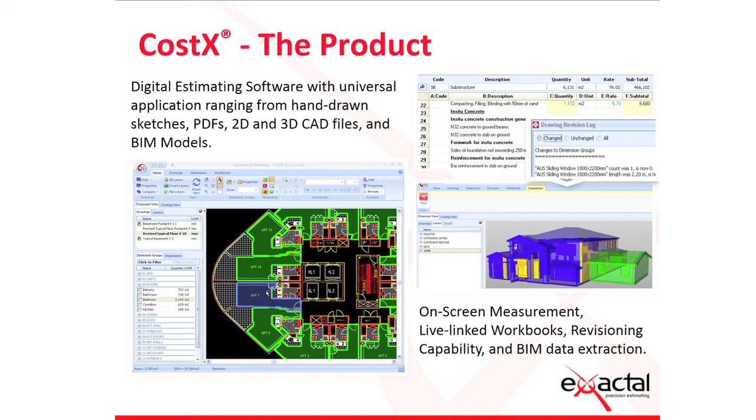The fact that it live links the quantities into the workbook, so the quantities that we take here are actually live linked into our workbooks, which means that if you update the quantities, the workbook updates too, and that live linking sort of helps to avoid scope creep, those sorts of things. Particularly the revisioning capability, the fact that when the drawings change, because we've linked into the CAD data or the BIM data, we can actually show you where the changes occurred and update the quantities. So again, that sort of elimination of scope creep is a very important aspect.

So essentially that's what the product is, and the reason people are buying it is for those sorts of key reasons. Now, because tonight we're going to be talking about BIM, and it's always important to make sure that everyone's on the same page as to what exactly BIM is.

So any kind of drafting, whether it's 2D or 3D, is simply lines on paper or on a computer screen. To denote a door, we simply draw a straight line for the door leaf, curved line for the swing arc. We all know it's a door, but it's just lines.

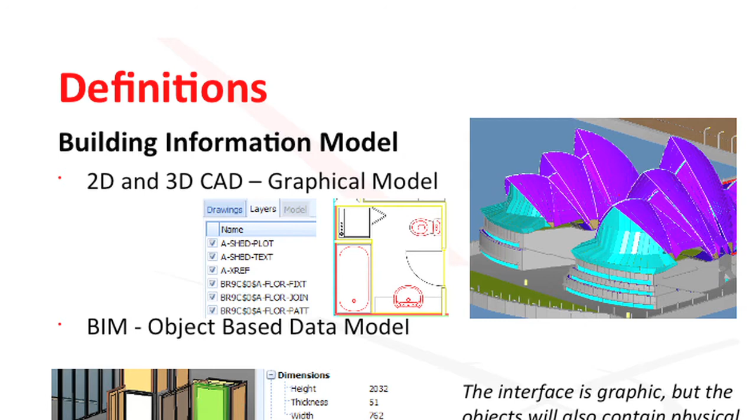BIM is object-based data modelling. The designer literally builds a model out of a kit of parts. They have a library in their computer. That library is database driven. It consists of objects. If they want to put a door in a building, they go to their library, select a door object, place it in the building. The door knows that it's a door.

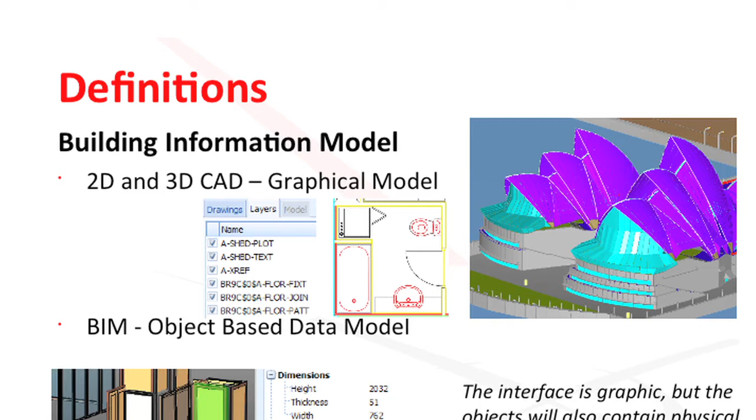It carries properties relating to the door. And importantly, it also carries properties about its interrelationship with other objects. So when it's placed into a wall, the wall knows that there's a door, an opening gets formed. And it's that interrelationship of the objects that provides a lot of the power of BIM modelling. And it's also the fact that you have that data that you're then able to share amongst the team and to carry out various analyses of the model.

So the differentiator is BIM is object-based data modelling. It's not 3D drawing.

Building information modelling, I mean, BIM is an acronym. A BIM model is not really, it's a building information model. Building information modelling, it's like the distinction between a cost plan and cost planning. Cost planning is the process that you go through, as opposed to a cost plan that's a snapshot at a particular point in time. Because of that data model, you have the ability to analyse the model, run what-if scenarios.

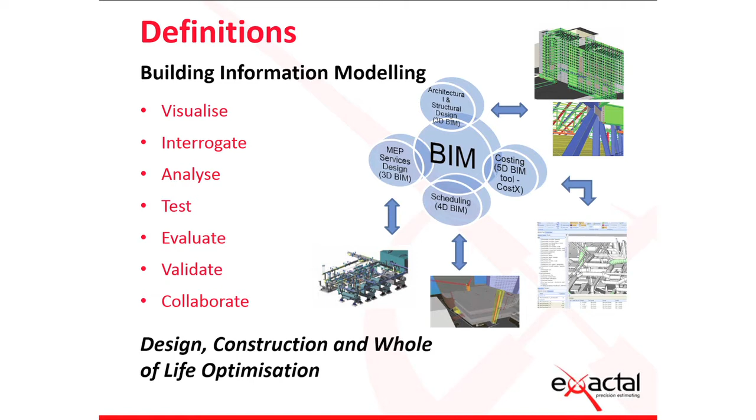Test the design, test various options, and it can all be done very quickly and readily. The information that populates the model obviously informs the analyses that you do, so the better the information in the model, the more reliable the outcomes are that you're going to achieve. But simply, it's the fact that you can optimise the design by simply running any number of analyses to test the design and basically validate it virtually before you actually press the go button.

So that's what building information modelling is. So why is it of interest to quantity surveyors and estimators? Well, because improving cost outcomes is obviously a major performance metric for any project. That speedy data extraction enables you to basically process more data more quickly, so you can provide better advice. So you can feed back to the design team.

You can do it much more quickly, so that traditional lag where you used to wait to receive drawings, you'd measure them up, do your analysis. By the time you get back to them, they've already moved on, they're on a different page. You can virtually talk to them in real time.

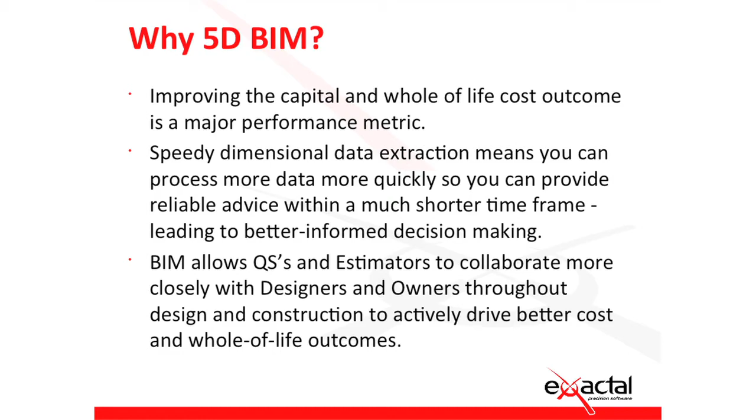It's not always important to have absolute figures. Often you're just running comparisons, and the fact that you can run comparative options almost straight away and feedback means that you can really actively collaborate and contribute to the development of the design in a way that you just haven't been able to do before. So that's why it's important to get on board with 5D BIM.

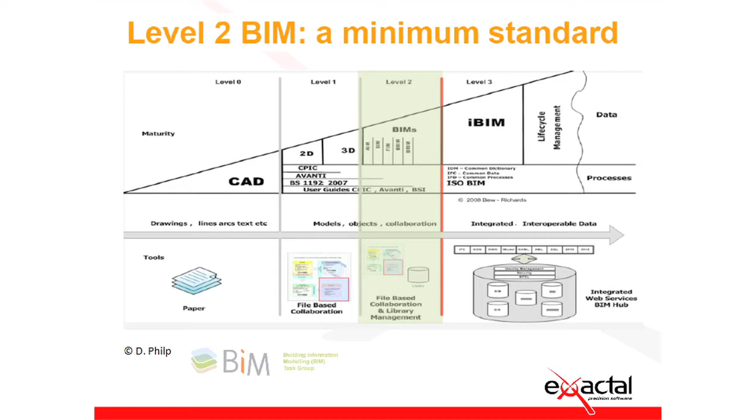Now, we were all aware of the Cabinet Office mandate for BIM adoption by 2016. There's been a lot of talk about it, and I guess the question is, what does it actually mean? So this chart, the Bew-Richards chart, talks about level 2. It's probably hard to see the colour, but they've sort of mandated to try and achieve level 2 maturity. The chart here simply you can see developing from CAD, 2D, 3D, drafting through BIM, ultimately to iBIM. They're looking for level 2.

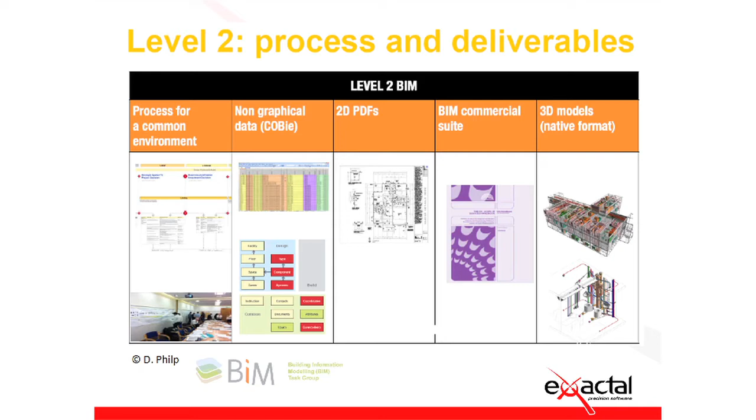Interesting though, the process and deliverables that are also defined as part of that level 2 has 2D with a very important function right there in the middle. So you're talking about a suite of documents, if you like. It's not just that there'll be a model and you'll have to work off that model. There'll be a set of information, and the information will contain a variety of different data types and sources. And importantly, it'll include a 3D model and it'll include 2D PDFs as well. And not necessarily PDFs, they can be in CAD format.

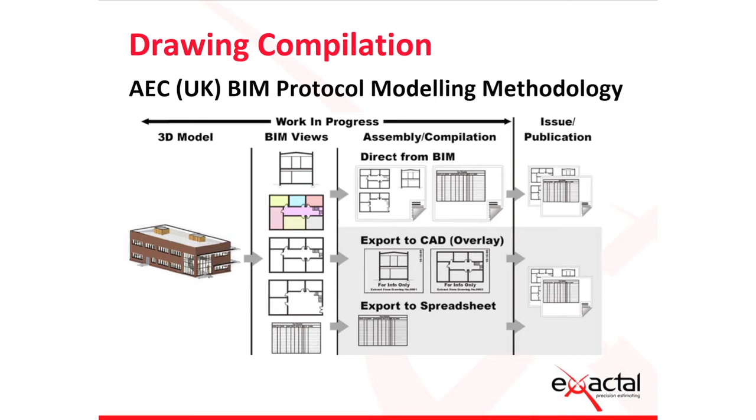If you break that linkage by putting output into CAD and then adding information in CAD separately, then of course you've broken the linkage, so you're not getting the benefit of the single source of information being the BIM model. So really this is more like the level 1 that we were talking about. This is level 2 up here.

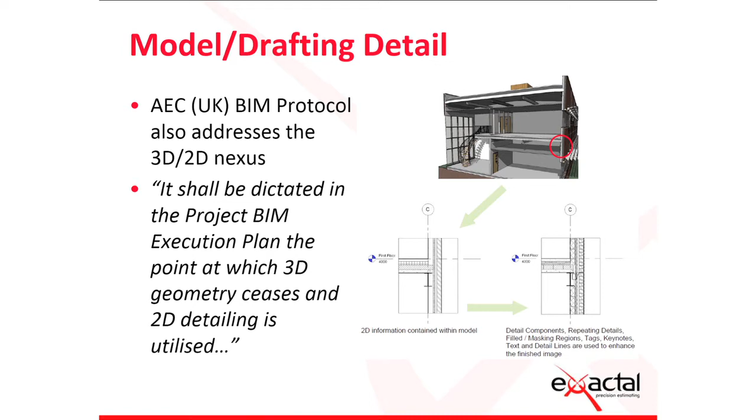So the AEC protocol also addresses this 3D, 2D nexus. So it actually says it'll be dictated at which point 3D geometry ceases and 2D detailing is utilised. So this is important because you can't model everything in 3D. And certainly for communication purposes, it's sometimes better to put things in 2D. If you're trying to do a furniture arrangement, it's a lot easier to work on a plan than it is to try and model it in 3D. So working from there, there will be a point where it's simply better and easier to put 2D detailing in.

The other important aspect of this is that it reduces the model size, because too much information in the model just makes the model unwieldy. It's cluttered and the file size is too big and people downstream can't handle it.

So that introduces an important concept known as level of development, which is defined by the American Institute of Architects, but actually has pretty much been adopted now. It's not the level of detail, it's not drawing detail, it's the reliability of the data. In other words, it's how far the design has actually been resolved, what decisions have actually been made that you can rely on. So simply LOD 100, you know that you're going to put a chair, you don't know what sort of chair, you don't know what it's going to be like, that decision won't be made for another 18 months.

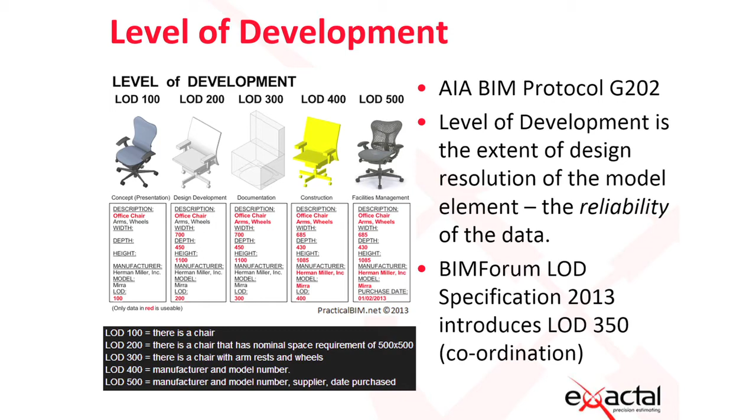So make sure you allow for a chair, but at this stage we don't know what it's going to be. As you go through 200, 300, 400, you can see it's the data being added that relates to the resolution of the design. It's not the detailing. Because what will happen is that at the very earliest stage of a model, there will be a lot of detailed rendering of things like chairs and furniture and all sorts of things. They will look very detailed, but the decisions have not been made yet, so you can't necessarily rely on them.

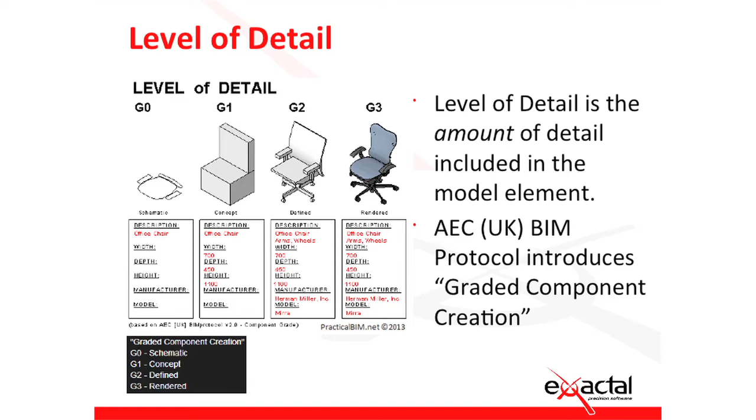This is as opposed to the level of detail, which talks about the resolution. And the BIM protocol has actually used a different name. They've called it graded component creation because LOD becomes too confusing. Do you mean level of development, level of detail? And so, as you can see, G3 is fully rendered. What you could well end up with is that you get a G3 rendering back at LOD 100. So as I say, it's the very earliest concept stage, but you've got a fully detailed chair.

And the issue with that, as I say, it'll make the model too big, it'll clutter the model, but also it's deceptive because you'll assume that decision's been made and actually it hasn't. So a BIM execution plan can include a table that lists out levels of development for the various elements in the model. So the way that this might look is, you can see here where we've got the level of development from 100 through to 500, similarly level of detail.

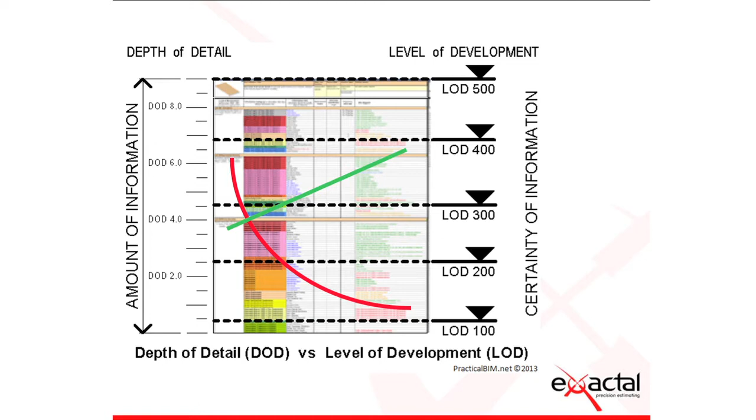What will happen with your earlier models is that you'll probably have a lot more detail than you do level of development. So BIM models look really impressive because they look so resolved, but they're not. They're very early in the stage. What you're actually looking for is something along those sorts of lines, where you've got a high level of reliability, the design decisions have been made, there's enough detail for you to see what's going on, but not so much detail that it makes the model unusable.

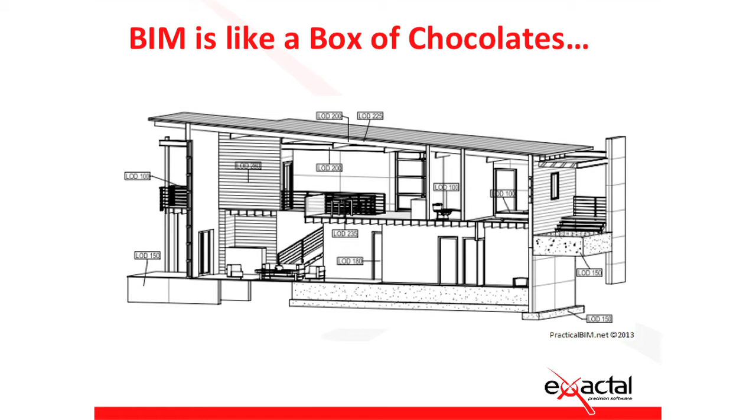What this means is that when you receive BIM models, the various elements within the model are going to be at different stages of development and different stages of detail. And part of what you have to do is sort out the wheat from the chaff. It's all usable, it's great, but it's the judgment you'll need to apply in pricing these things or rating them up as to whether they're a concept style decision, even though it's drawn in a high level of detail, or whether the specification is actually finalised and you can rely on it.

Just quickly, there's often a concern with BIM that it means the designers have to do a lot of extra work, they have to put a lot of information in, or they have to code it for you. That's not the case. You don't actually have to ask them to do a lot. A default model still has a lot of usable information for you. There's probably only 3 things, and in fact there's 1 thing per file format.

If they're using Revit and they're going to send you a DWFX, they need to set their project units to 3 decimal places. Otherwise, the dimensional data generated in the model is rounded up or down. If you've got a commercial building with thousands of curtain panels, if every curtain panel is rounded up or down, it can make that sort of a difference to the quantity. So you definitely need the project units set to three decimal places.

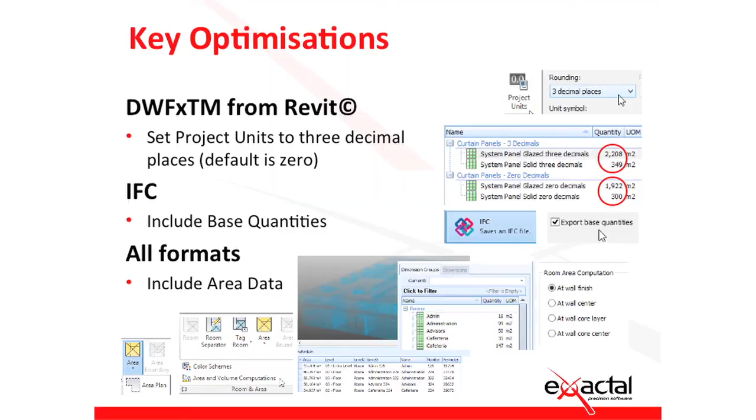If they're going to send you an IFC, that's fine, but IFCs by default in their current implementation don't include quantities. So you might receive an IFC and there's no quantities in it. They need to just tick a box: export base quantities. If they tick that box, then you get the quantities.

For all formats, just ask them to use the area tool to define areas. It's very simple and quick to do, and certainly for early stage cost planning, receiving room areas and floor areas is really useful. Otherwise you've got to measure it yourself, which is fine, but if it's coming from the model, it's really helpful. So if they just do those things, that'll really get you off to a good start.

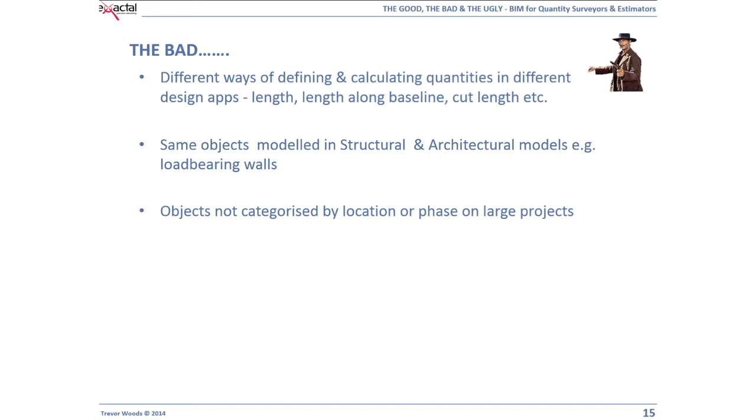Objects not categorised by location or phase on large projects, so where models have taken shortcuts. Uncategorised MEP systems, where everything is lumped in under the same system. Stairs, I thought, super, push a button, it'll give me the volume of concrete.

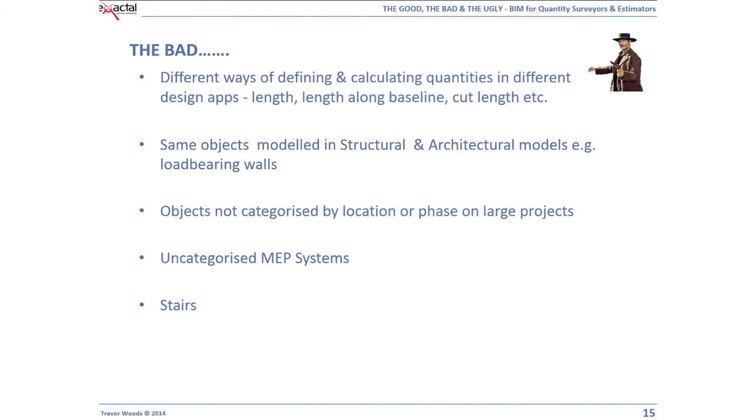No. T-shaped windows. Now, some of these issues have been fixed in later versions of the software. A project where there were T-shaped windows, it didn't deduct the correct volume or area from the wall that the window was hosted in. Another slide of bad. Wall areas, depending on how the wall joins or how they've modelled it. Wall gables can be an issue. Irregular shaped floor slabs can be an issue, but I'll explain these in a little

bit more detail. Rebar, haven't seen it in too many models. When it's in models, it's super. You can get the tonnage off the bat, you can get the sizes, you can get the lengths, no problem, but I haven't seen it modelled in too many models, especially not designers' models. Slabs, pads, beams and columns overlapping, where the volumes are a bit askew. Column lengths not transferring, they're in the Revit model, but they don't transfer out into the QS software.

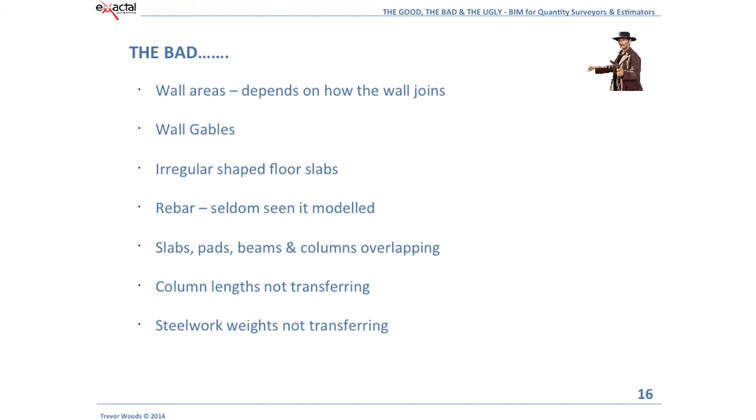Steelwork weights not transferring. So just to explain some of the bad, the perception is that the I in BIM is huge. When I started using BIM first, I thought, great, I've got a database with all of the specification information and all of the material information and all of the quantities in it. But in reality, the information component is quite small. So you're getting the information in there, but often it's cryptic, or there's information in databases that lie outside the BIM that you've got to try and refer to.

This is a sample of a schedule taken from Revit, one of the BIM modelling tools. And casework is built-in furnitures and fittings. Anyone guess what that is? It says countertop corner 600 depth, 625 wide, 900 high, and there's a keynote. And the next one is 6 of these FURN classroom wet area classroom, 2,800 wide by 900 high. Anyone guess what it is? Any sort of a wild guess at all? Yeah.

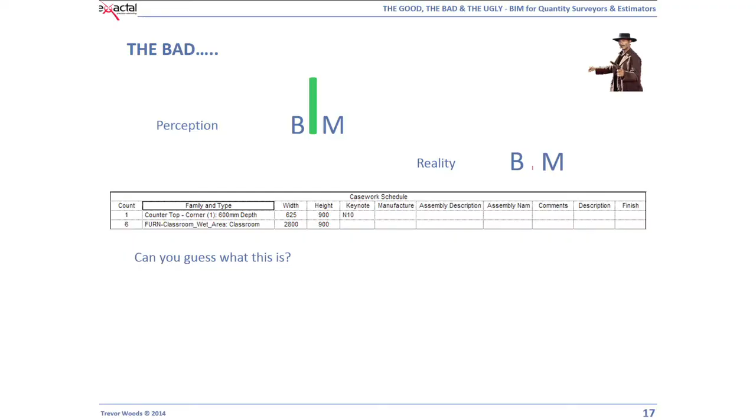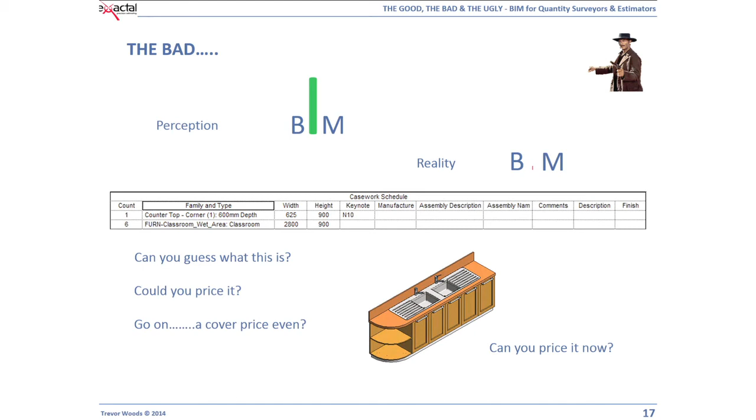That if an architect says, but I can give you the schedule, I can give you the quantities, don't use them and take them as gospel. You have to see the stuff in context. You have to be able to look at the item and see what does that relate back to. So yes, you can take the schedules, but I would take schedules from designers and use them to check my measure, whether it's a 2D measure or whether it's checking your 3D measure. But certainly don't just take it as gospel from the model itself.

Cryptic descriptions. This was a pilot project I worked on last year. This item was called, or was tagged as a roofing accessory. It's a bloody sculpture of a horse. Architect, super architect, but a sculpture of a horse was modelled. And it came in through the software as a roofing accessory. Now, you're pressed for time, you don't go and look. Fucking sculpture of a horse.

So, is it inflatable? Is it concrete? Is it bronze? Is it papier mache? Suffice to say, he was value engineered out. All right, didn't last too long. So a roofing accessory. So it's a cryptic description. It's not tagged. It's not labelled. If architects are going to do stuff like that, get them to put something in that you can say, well, it's a red flag, flag it, so that you know to look at it in some bit of detail.

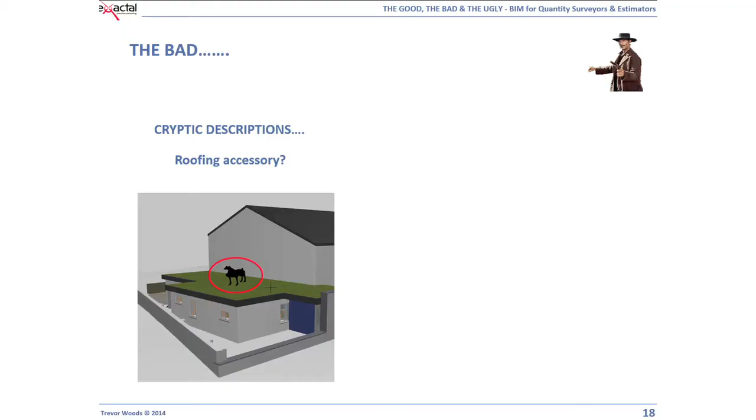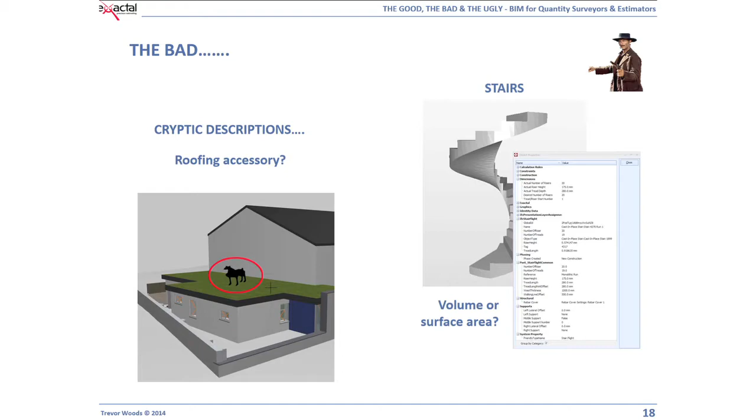This was an example, stairs, spiral stairs, you bring it in, you think, great, I'm going to be able to get the volume of concrete. Look at the properties, there's no volume or surface area. Okay, so you're still trying to figure out the volume of concrete in your spiral stairs. It gives you the number of risers and the width and the waist and various other bits and pieces like that, but in some instances it doesn't give you what you think you will get from it.

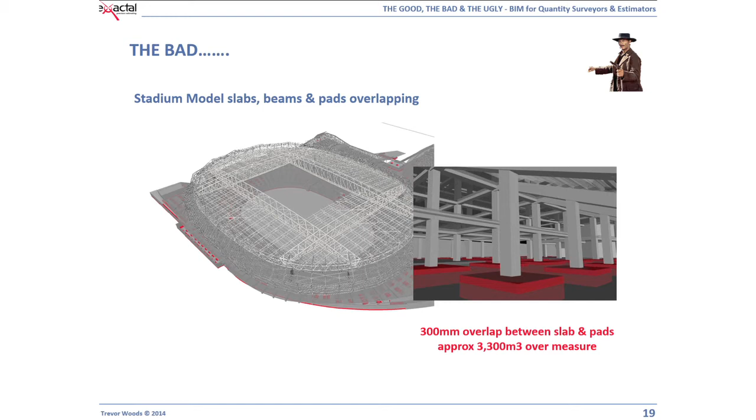The slab ran up to the top of the pads, and the pads, this red area here should have been deducted out of the slab. But what we got was a 300 mil overlap between the slab and pads. It was about 3,300 cubic metres of over measure.

The only reason we caught that was that we'd previously done an exercise on this in 2D, and we had the quantities, and we could say, yeah, there's an issue with the quantities. It's gone up by 3,300 cubic metres.

We were way down the food chain. We were sub consultants. We had the model sort of unofficially, so we couldn't go back and query it from the contractor or from the designers. We couldn't ask to see the model in its native format. We had it in a format called DWFX. But we picked it up, we used our judgment, we figured out there was an issue with it. It didn't tally. Visually, we saw it.

Uncategorized MEP systems. This is the same stadium project. There was 36 kilometres of pipework. 16 kilometres was classed as hydronic supply or return. That's all it said. It told us the material, told us the size, but they were all classed as hydronic supply or return. We were producing a cost plan.

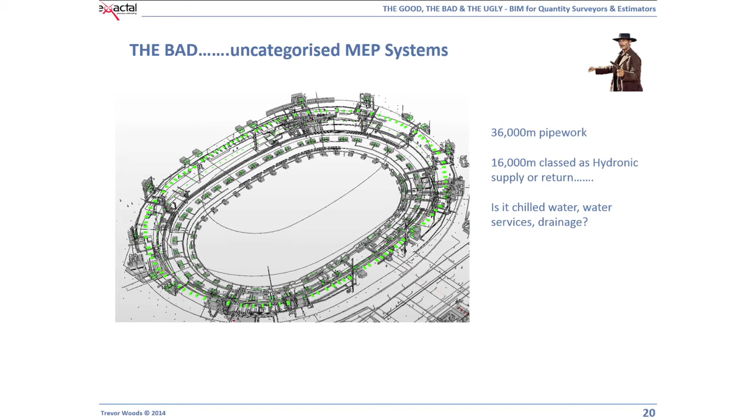So we needed to know, is it chilled water? Is it hot and cold water services? Is it drainage?

It was a simple matter for the engineers to go and tag stuff as they actually model it. For us, we had to go and switch stuff on and off and try and isolate items and try and see, well, what's it connected to? Is it connected to an air handling unit or a fan coil unit, or is it connected to a toilet?

So small things. I mean, it was super with the ductwork. To be able to go and measure the ductwork on that stadium in half a day was phenomenal. But we had some small issues with it we had to go and try and figure out, and the amount of ductwork in it was just ridiculous.

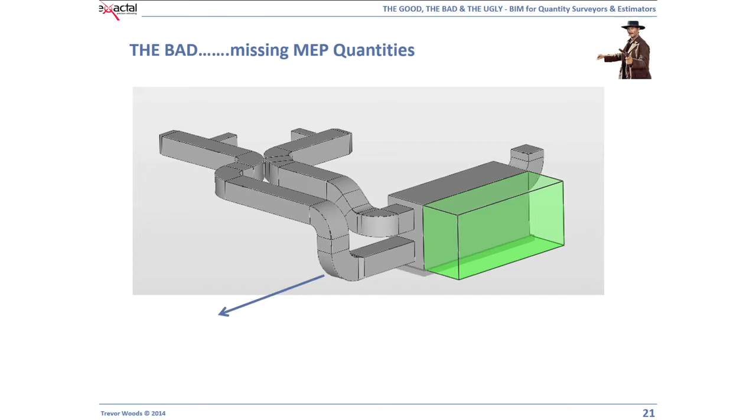Missing MEP quantities. This was a piece of ductwork from the model itself. It told us the number of bends, and we were doing the ductwork by square metre. It didn't actually give us the area of ductwork in the bend itself, so you were going back to try and come up with an approximate measure of ductwork for the bend.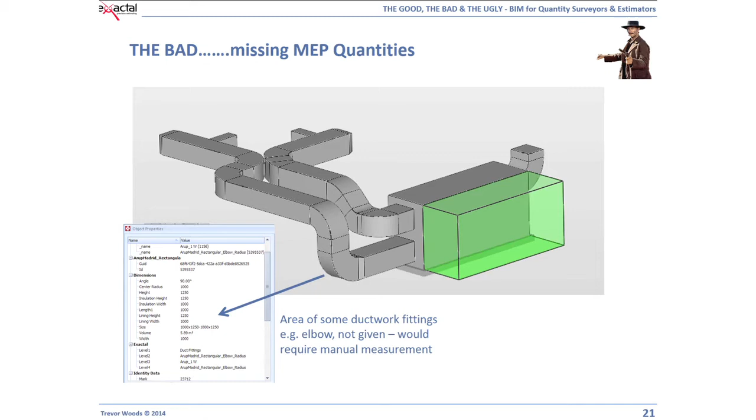So small things that can cause some annoyances, but the engineer, if he pushed his button, he still wasn't going to get the proper quantities out of the model itself. So if architects and engineers say, we'll push the button, tell them to go ahead and see what sort of quantities they want to get out of the model itself.

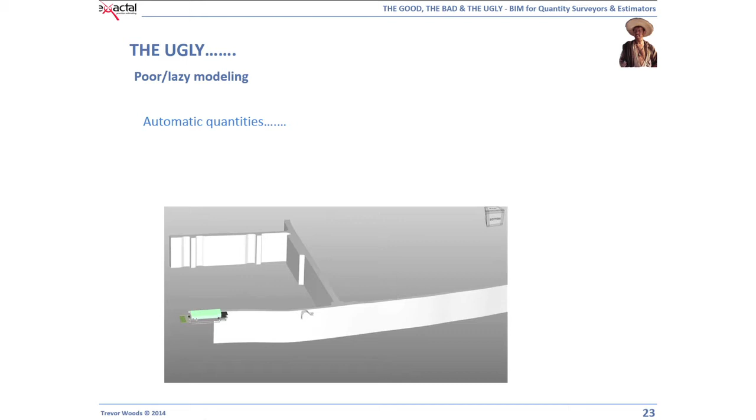The ugly, the poor and lazy modelling. This was a pilot project I worked on last year - a small community centre being refurbished. The architect, when he modelled a lot of the roads around the building, didn't set the bottom plane correctly. He should have probably set it at 400 or 500 mil, but it went to whatever number of metres.

This was all hidden, so you'd have a layer there which is your topography, and unless you get in and switch stuff on and off, you won't see it. So if the architect had gone and pushed his button, he would have gotten...

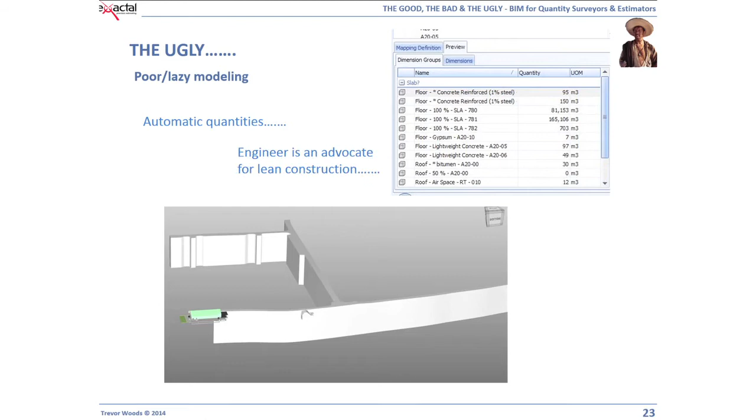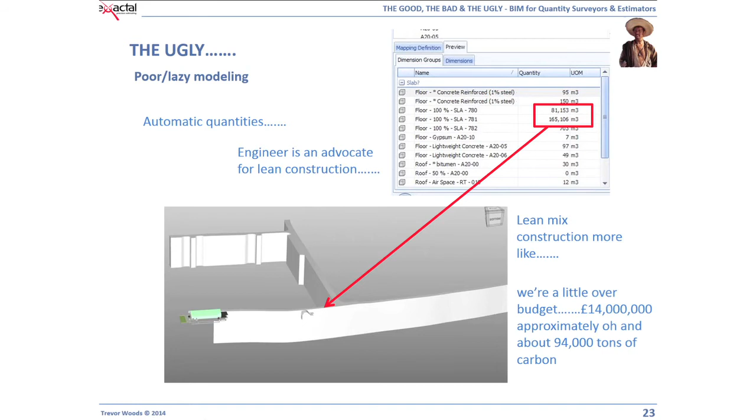On this project the engineer was a big advocate for lean construction - more lean mix construction. There was something like 81,000 cubes of concrete and 165,000 cubes of concrete in these structures here, about 14 million and about 94,000 tonnes of carbon. It was just an illustration to show the architect, well look, if you push the button and got your schedules, this is what you would have gotten. So QSs are needed to validate.

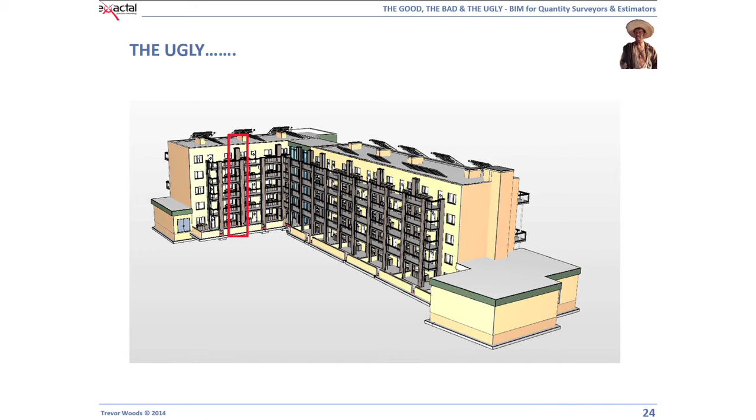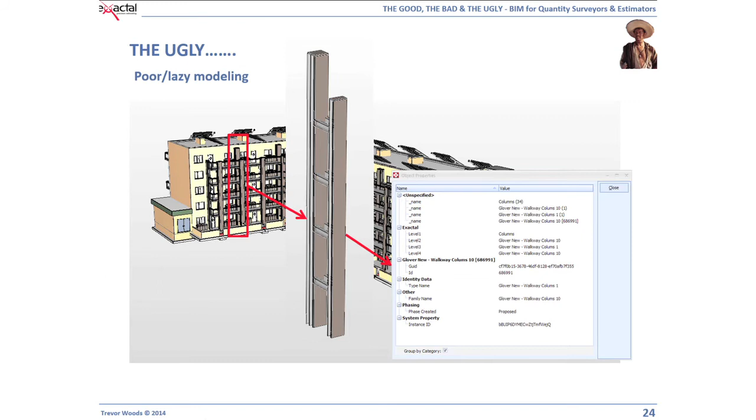Poor lazy modelling - this is a refurbishment project. The architect had decided to put on these external balconies but didn't have balconies or these objects in his library. He modelled them as a mass, so we got no information from that. It told me it was a walkway, columns one, family name was walkway, columns ten, and that was it. It gave me a count, so I knew there was twenty-four of those, and I would still have to go back in and do a manual measure on that.

If the guy had modelled it in a fashion that, well, we could have gotten the tonnage of steel from it. So really, that was worthless to a QS or to an estimator. It wasn't going to improve my process or make it any quicker.

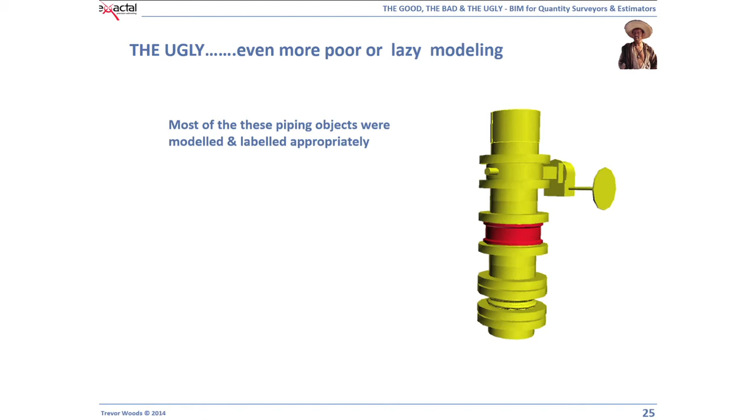This was another example of a project I'm currently working on - I think it's 500 mil diameter chilled water pipework. This object here, when we imported it through CostX, it was modelled as a 3D solid with no other information, no data about the object itself. We have a QS I work with who's phenomenal - MEP QS, mechanical QS, process QS - he reviewed it and reckoned something was wrong.

We thought maybe it's a gasket or a flange or something, not expensive. He said, no, that's a valve. He checked the P&ID and it showed us a check valve, worth about £4,000, and there were 15 or 16 of these on the particular system. So it was a big miss - either the P&ID hadn't been updated, the model hadn't been updated, or someone took a shortcut and it went in as a 3D solid because the valve didn't exist in their library.

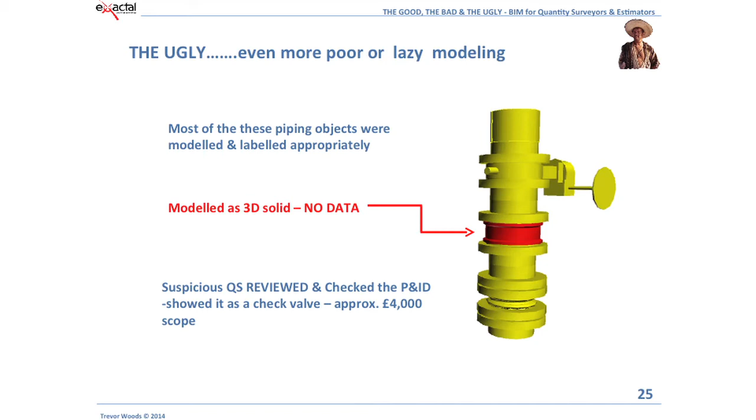The same engineer - I gave him a 12,000 line extract from CostX of MEP stuff, and within 5 minutes he could come back to me and say, the model is wrong.

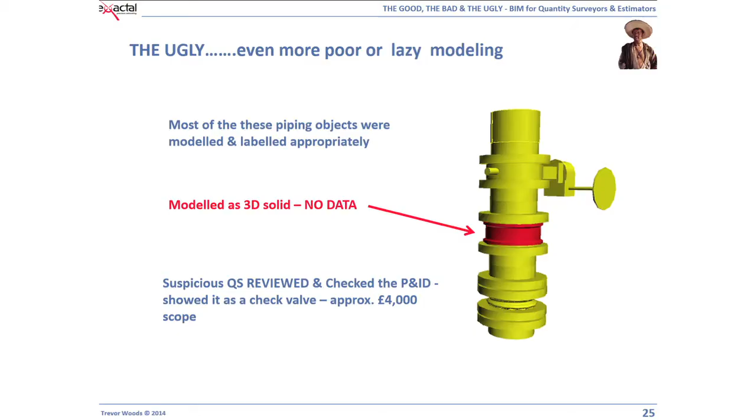This was just a quick run through those problems and the root cause of them. You can see most were caused by people and how they've used the design software. It's all down to architects and engineers not seeing our requirements or modelling in a particular way. Ultimately it's our fault, because we haven't engaged with QSs, or as QSs, with architects and engineers, giving them feedback. We haven't told them we're not using BIM, so we don't know, we can't give them the information. They don't know their model is unpalatable to a QS or estimator.

So most of the issues are with people, some with process, and some with software. The software stuff is improving. Since I went through that list, this has changed, and this will change, this was down to the fact that the stuff was round-tripped. So most of the stuff there is fixable. It just needs a QS to get involved and start talking to designers. After all, you're thinking, why would we bother, what's the point?

This is the traditional approach to design. The architect would normally throw a set of plans over the wall to the structural engineer, who'll throw them over the wall to the services engineer, who'll throw them over the wall to the poor QS at the end of the chain. And we cost a completed design.

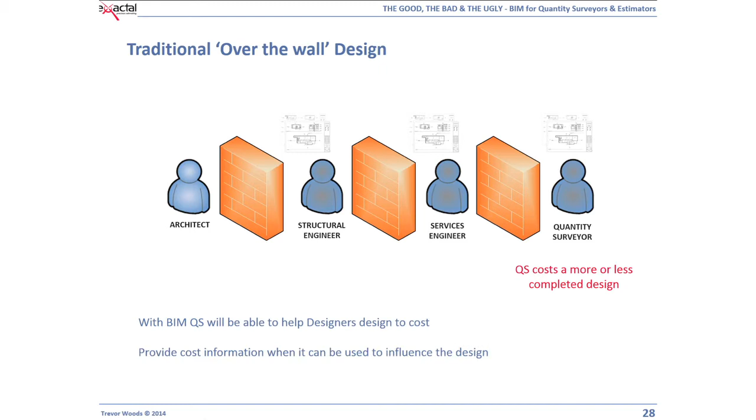So we're costing a completed design. We're not helping the architect design to cost. We're failing in that we're not giving them information at an early enough stage, quick enough, to help them influence their design. We need to be able to help them design to cost, providing cost information when it can be used to influence the design itself.

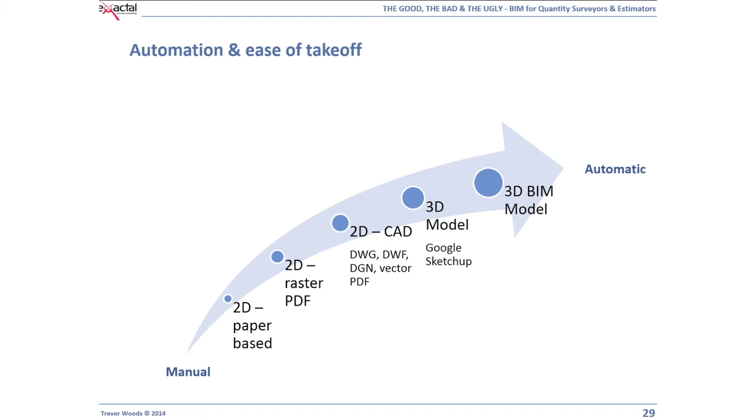In terms of automation and ease of takeoff, 2D paper-based is the slowest process you can do. Raster PDFs are a bit faster, and ultimately a BIM model gives us the fastest quantity extraction of everything. Someone doing stuff on paper versus the BIM model, the model wins hands down. But it's crap in, crap out.

I think what we have to offer as an industry, just want to check my time here.

The traditional 2D design process, we normally start designing, say at 30%, then have a value engineering exercise and a lot of design will have been wasted. We go back to redesign, start again, get to 60%, maybe there's another value engineering exercise. The process starts again, design has to be redone because we're over budget. We start again.

So there's an awful lot of design time wasted and value engineering exercises done which breed resentment on projects, because ultimately it's the quality of the finished product that suffers. It's normally the finishes that suffer. As QSs, we have to start offering...

Concurrent costing, where on a weekly, fortnightly, or monthly basis, we can put the model through a quantity extraction process, run some costs against it, and produce a cost report or cost check on a much more frequent basis, influencing the design so instead of them doing a huge amount of design and wasting resources, it's controlled on a quicker basis. Anyone working on design and build or in a JV, if you can offer this to your contractor or client, it's phenomenal. You can get much tighter control on your costs at an earlier stage in the project.

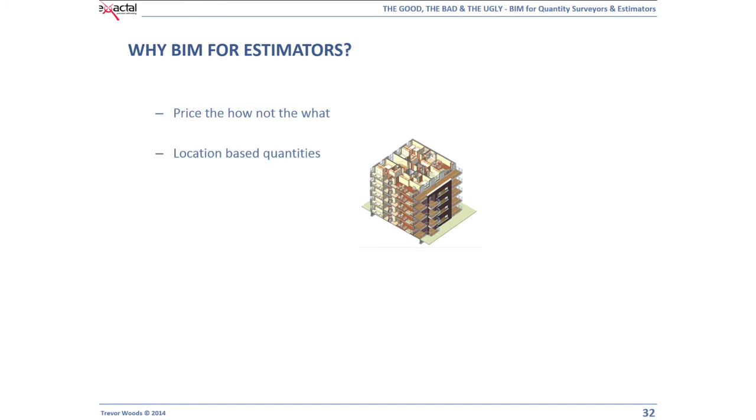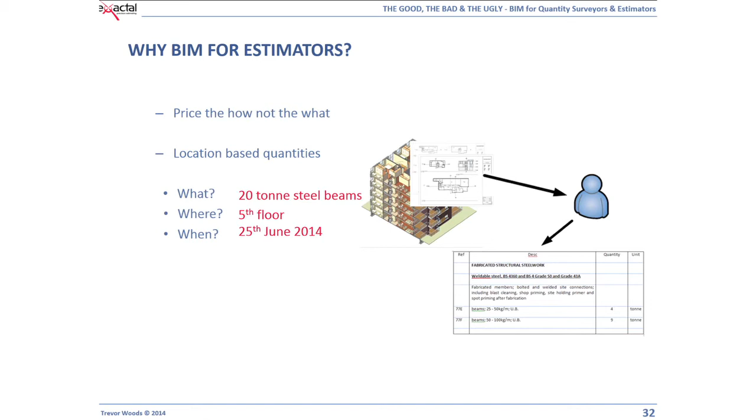As quantity surveyors, generally we'll measure in 2D, we'll measure by floor or by plan. But we compress it all down into a bill of quantities, and as an estimator, you get one line that tells you you need 200 tons of steel beams, or you need 300 tons of steel beams. You don't know where you need it. You're applying a rate across the board to your structural steel.

Maybe you're placing steel up on roof level, and the particular week you're installing it, your tower crane is busy, you've got to bring in a mobile crane, and it's costing you £5,000 a tonne, versus placing structural steel at ground floor from a telehandler, it's costing you £1,500 a tonne.

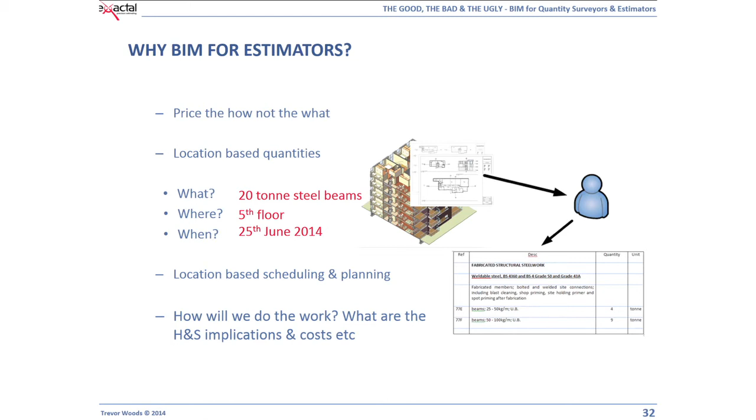So to me, you get a bill of quantities as an estimator, you get the model, you still run your own quantities, you produce location-based quantities, you become more strategic in your estimating or pricing. You look at where the actual work is in the building itself, and you change your rates to suit that. How will the work be done? What are the health and safety implications? What are the costs?

I think what it's going to mean for QSs is we'll do less work at tender stage preparing the BQ, but we'll do more work at earlier stages extracting quantities and designing and costing design options. So there'll be less work but more often. So architects and engineers say, yeah, but it's easy for you guys. Well, we're just going to do less work, but we'll be doing less work more often. It's going to balance out. And it's not going to give us a huge amount more time. And we're going to be adding more value.

Designers can design quicker and they can iterate through designs faster. So they're going to have a huge amount more options that they want cost checks done on. We'll need to keep up. We probably have to start looking at producing carbon estimates. The UK government BIM mandate, they're looking for a 20% reduction in cost, and they're looking for a 27% reduction in carbon. Who's measuring the carbon reduction? So it's an area where QSs can easily start producing carbon estimates.

Mitchell Brandtman in Australia talk about a living cost plan that changes as the building evolves, and they talk about having two columns, a cash column and a carbon column. And we can do it very easily from BIM models themselves. Good BIM means less work but more often. Bad BIM is more work more often, and ugly BIM is just purely bad work.

All right. How do you make it work as a QS? You have to understand what BIM quantities are. Designers' building information models will generate design quantities. They're not construction quantities. It's what's in the finished product, not actually what's gone into the product itself. We discussed 2D details earlier on. We discussed not everything was modelled.

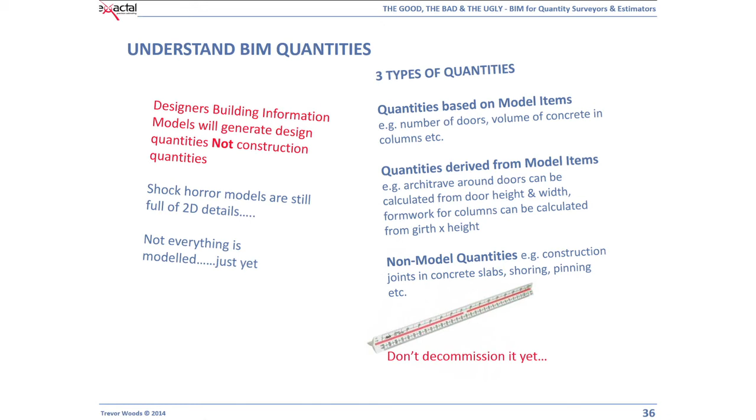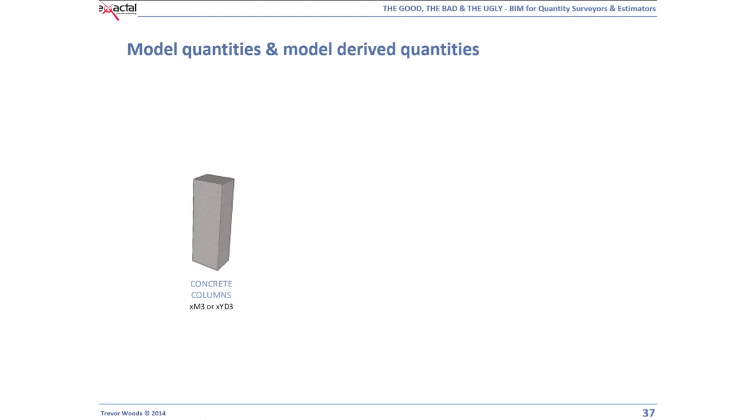Excuse me, I wouldn't decommission the scale rule just yet. All right, maybe it'll be an electronic scale rule. You know, I would be advocating moving to on-screen takeoff. And just to illustrate it, from the concrete model, in the model itself, we can get the rebar, the concrete, and the formwork. We can derive some quantities from the model.

How do you overcome bad and ugly BIM? It's all about validation. Validate, validate, validate. Talk to designers. Talk to them at the start of the process, during the process, after the process. Give them feedback. Tell them what does and doesn't work. There should be a document called a BIM execution plan on the project. A BIM execution plan just sets out who does what, when, what software they're using.

So if you look at the BIM execution plan, you should be able to see, well, they're designing in this, they're sending it out to this, they're bringing it back in. So it should raise some flags. It should tell you about software versions. So I would look for a BIM execution plan if one exists on the project. Ascertain if the designers are exporting models for analysis, as we discussed earlier on.

You have to figure out what's in the model, what has been modelled, but more importantly, what's not in the model. Is there a gap in the scope? Is there stuff on 2D drawings, or is there stuff on a civil engineer's survey plan? Not everything will be modelled, so you have to try and figure out what's not in the model and how do you measure it, how do you account for it. You need to improve the good, fix the bad and eliminate the ugly.

This didn't get a reaction last night at all.

It probably is derogatory, but I think QSs are essentially what we will be: building information ferrets. Trying to figure out what is missing from the model, or what the hell are objects in the model. I spend a lot of my time scratching my head thinking, what is this object? Or else we're BIM detectives.

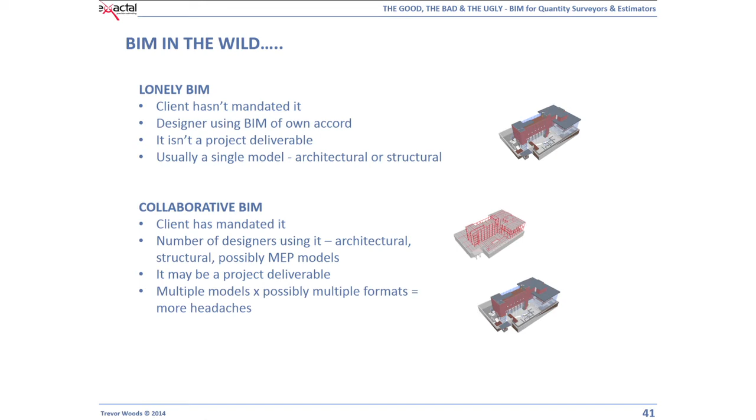And just quickly to run through BIM workflows. MEP workflows. The first thing, I'd review the BIM execution plan, what is and what isn't modelled. I try and find out what role do the single line diagrams, process flow diagrams, P&IDs play. Will you still need to measure scope from P&IDs? Is there stuff on the P&IDs or on the schematics that isn't actually in the model?

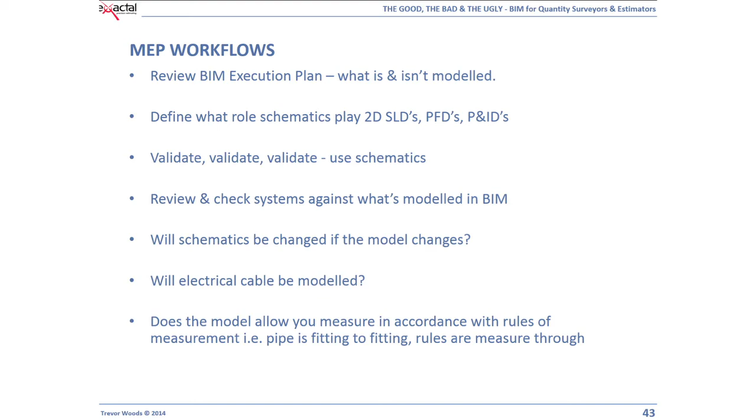Okay, vital with MEP projects. Validate, use the schematics. Chances are with electrical stuff, cable won't be modelled. You'll still be going back to a cable schedule to actually take quantities from that. The panels, the containment, chances are will be modelled. Review and check systems against what's modelled in the BIM. So you'll use your P&IDs and you'll use the 2D stuff to validate what's in the 3D. If the project changes, will the schematics change if the model changes and vice versa?

Does the model allow you to measure in accordance with rules of measurement? Okay, so if you're using CESMM to measure MEP stuff, normally you measure through fittings, and the fittings would be extra over. So if you're using an agreed schedule of rates with a contractor, do you need to adjust your schedule of rates? Because BIM will measure fitting to fitting, it doesn't measure through fittings. Okay. So you need to just look at the rules of measurement and see how you can amend either what you're measuring, or how you can amend your schedule of rates to account for these particular issues.

For CSA, Civil Structural Architectural, review the BIM execution plan, validate, review 2D details. Is there 2D scope? What's the demarcation between 2D and 3D? Come up with a BIM risk register. Anything you think that is a risk or there is a potential of over-measuring, under-measuring, identify it. Come up with a plan for how you're going to deal with it, but document it.

And I think you need to measure in a tool that will allow you to combine 2D and 3D measures. Some applications will let you do 2D or 3D. Very few of them will let you do 2D and 3D, but you need a tool that can do both. Are the civils or groundworks 2D? Because BIM isn't just building, it also applies to infrastructure. You know, there's a big move to get infrastructural projects into the whole BIM space as well.

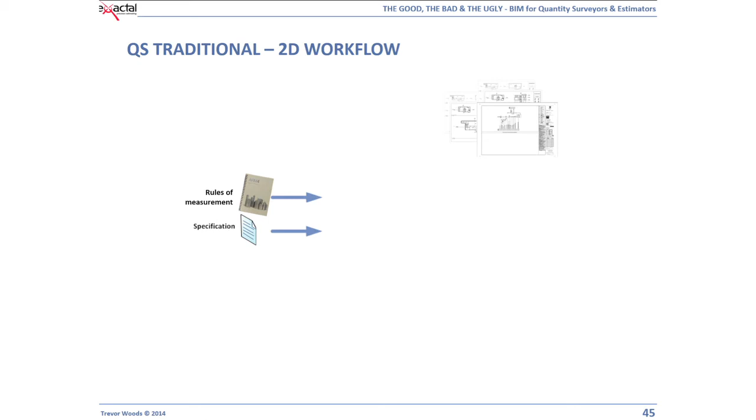The traditional workflow, we take our 2D drawings, we take the rules of measurement, this is the Irish rules of measurement. Essentially what we're doing, we're taking the plans, we're taking the rules of measurement specification, we're creating construction recipes. We're applying those to quantities that come out of the model, and we're eventually attaching our unit costs to it, and we're coming up with a cost plan or our estimate.

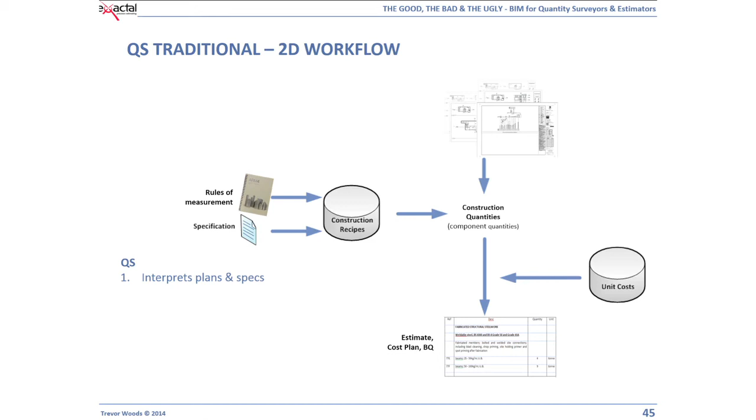So we're combining, we're reading the rules of measurement, we're reading the specification, and we're creating construction quantities. The model will give you design quantities, but we put the intelligence on it. We apply these things to it.

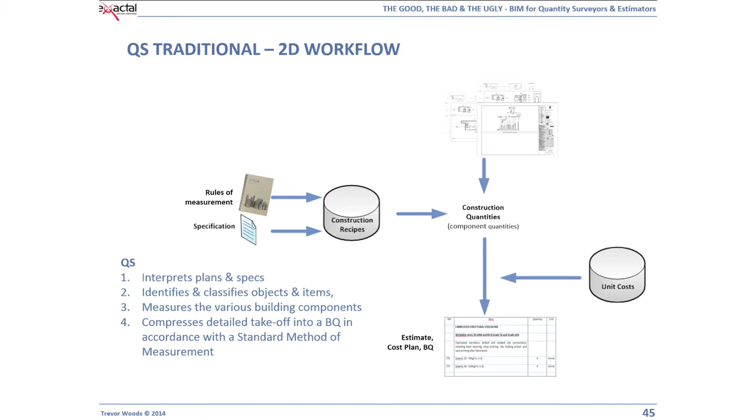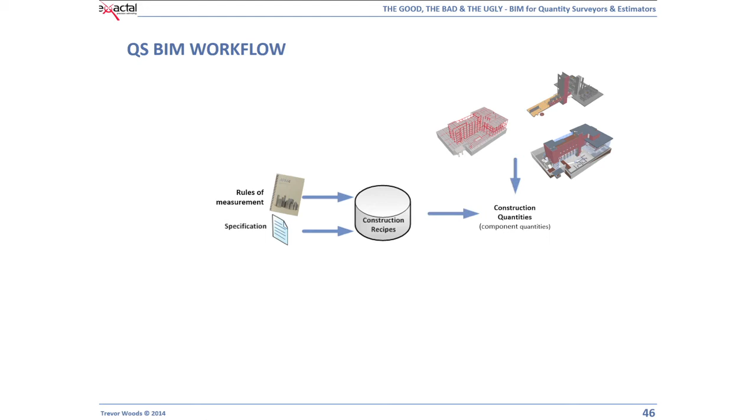The BIM workflow, essentially, it's the same process. The only thing that's changed is our quantities have been generated from the model. We're not actually generating the quantities. We're taking the design quantities and we're attaching the rules of measurement and specification to them. We're creating construction recipes. We apply our unit costs and we produce our estimate or a cost plan or a BQ.

So essentially, the process to this stage doesn't differ. And I think what I've found over the past couple of years is I'm not doing a 2D or a 3D, it's a hybrid. I'm having to work with 2D and work with 3D. Apply the rules of measurement, read the specification, create my construction recipes, create my construction quantities and create my bill of quantities or my estimate.

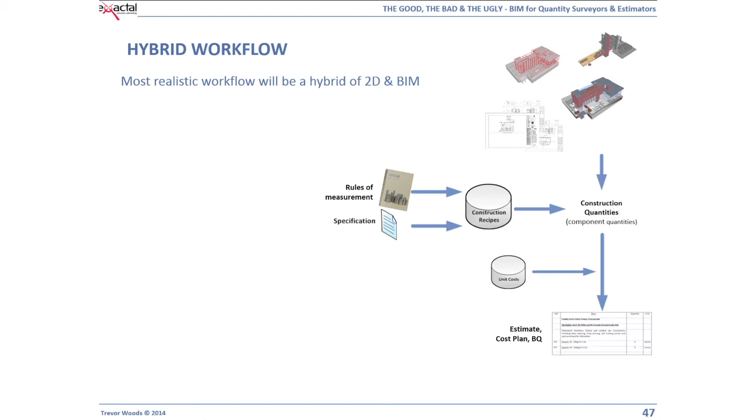So really, this is all quantity agnostic. It doesn't care whether they come in from 2D or 3D. So essentially, below the line, it's going to be the same or similar type of process. The key is having a tool that will let you do pure 2D, 2D and BIM, pure BIM. You'll have designers only doing 2D, you'll have some doing 3D, some doing paper.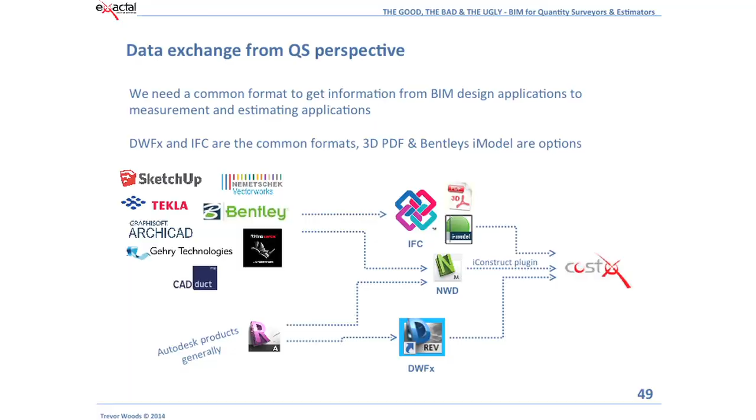Chances are it's either IFC or iModel or 3D PDF. From Revit, you'll come into a DWFX file. You may get some stuff in Navisworks, which you can route into CostX using a plugin. So CostX is probably the only application I've seen that can handle multiple formats. A lot of the applications will handle IFC only or DWFX only, or they might handle 3D PDFs.

So CostX, I've used a lot of the other applications, but it's the one that's worked for me using all those formats. And I think I've used all those formats apart from iModel in the past 12 months. My BIM toolbox, my data extraction tool. So to me, CostX is a data extraction tool. It's taking information out of the model. Essentially, it's my QS Swiss Army knife.

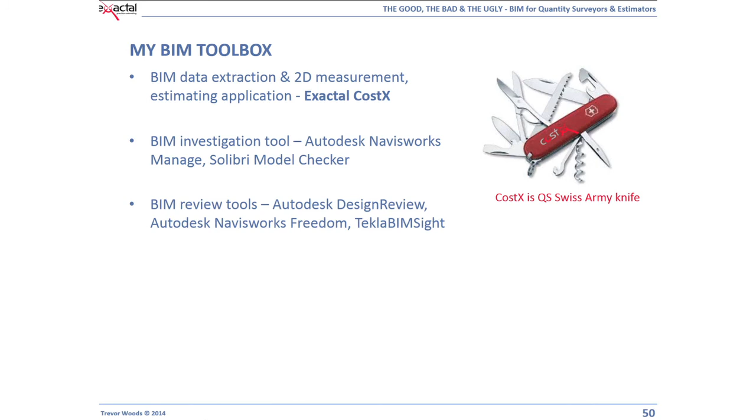So tonight, when you leave here or tomorrow, download Autodesk Design Review, download Tekla BIMsight. This will do IFC files, this will do DWFX files, and just have a look at models, and there's sample models up there on the websites. Just to get yourself into that space, Design Review will allow you to view 2D PDFs, will allow you to view 2D DWF files, will allow you to do some very basic redlining and measuring on screen.

It won't allow you to export the measurements, but have a look at those free tools if you're getting into the BIM space. Have a look at some sample models. Microsoft Excel, Microsoft Access, I constantly work with CostX and exporting stuff to Excel and bringing it back in again, and doing filtering and sorting and that stuff in Excel.

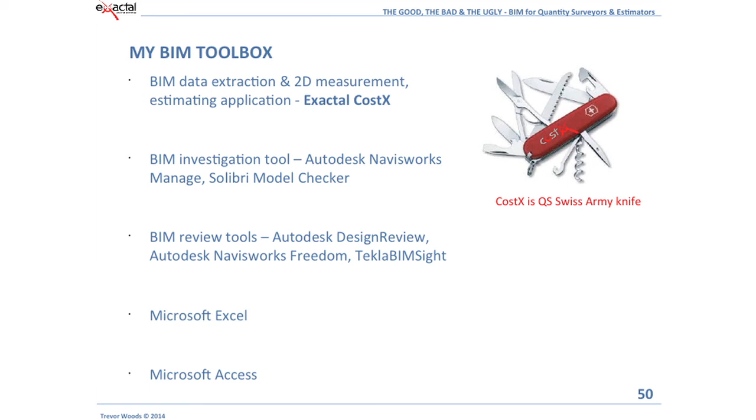And I'll just flick through this one. If you're having a conversation with an architect or an engineer, no 3D solids or in-place masses. If you're using them, label them. Create a simple BIM execution plan if one doesn't exist. Ask them, have models been sent out to analysis packages and back in again. Tag your systems. Share the model in its native format.

Often architects and engineers won't give you the model in its native format. Chances are you won't have a copy of Revit or ArchiCAD or Tekla, but if you have a copy, I would always ask them for a copy of the Revit model. Often they won't share it because of intellectual property concerns, since most BIM applications now come with some very, very basic libraries of objects.

So a lot of architects would have gone and built up their own libraries themselves. And they would have gone in and modelled up the doors and put them into the library. So they've invested a lot of time in it and they don't really want to share them.

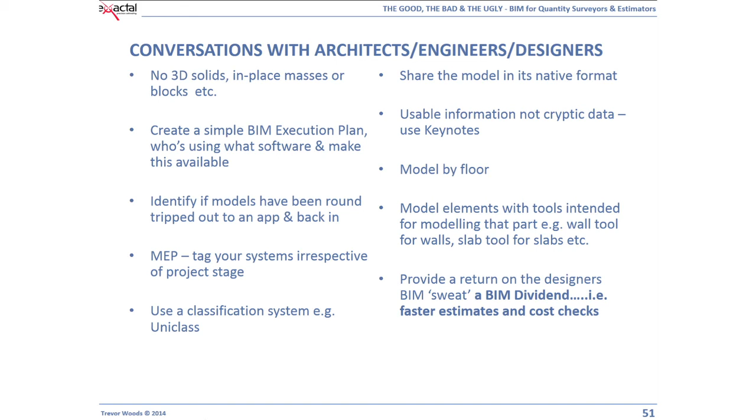Get them to model by floor or export the model out to you by floor. I would always take a set of 2D plans from the models as well. And I think we have to offer return on the designer's BIM sweat. We have to give them faster estimates and faster cost checks. And I think BIM really is a great opportunity for QSs to offer more services.

We can get into life cycle costing. When I left college in 1991, we were meant to be doing life cycle costing, and it hasn't happened. We haven't gotten into that space. Now we can get into that space and start producing stuff. Carbon costing is a huge area.

Living cost plans, waste management for contractors, waste management plans, coordination, constructability, clash detection. QSs can possibly look at doing this, offering this service to contractors. Model validation and verification services. And there's major synergies with lean construction.

I think technological problems are temporary and can be bypassed by process and people. So any technical problems I've faced over the past couple of years, generally we've managed to work around them somehow. Might have been very frustrating, you're climbing the peak and you're in the trough again, but we've normally gotten around them somehow. But it's having something flexible to do it.

You need to engage with BIM users and promoters and just counter the myth that we're afraid of BIM. I mean, I'm not afraid of BIM, I'm afraid of bad BIM. And the only way that will change is if we get in and start talking to people.

If we're to look at quantity surveying and estimating as construction equipment, traditional takeoff is a lump hammer and a cold chisel. So you're going demolishing a wall or you're demolishing a building. It's going to be slow. Anyone can use it. You don't need much training. It's hard work. If we look at on-screen takeoff, it's like having a Kango hammer. You need a little bit more training, a little bit of safety equipment, but you can certainly be a lot more productive.